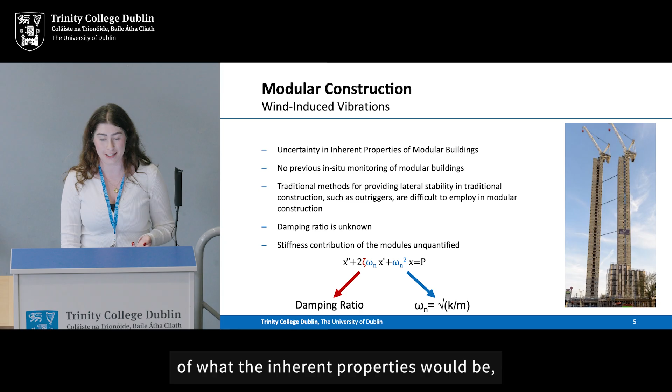So as this form of construction pushes to new heights, it also encounters new problems. And as for all tall buildings, as they become taller and more slender and flexible, the wind-induced vibration response can become the governing design criteria. So one of the main problems with modular construction is that, before this research, there was no prior in situ monitoring of this type of building. So we'd no informed idea, I suppose, of what the inherent properties would be. So in particular, what its damping ratio would be, so how quickly it can dissipate vibrations, and what its natural frequency would be, relating to how stiff it is.

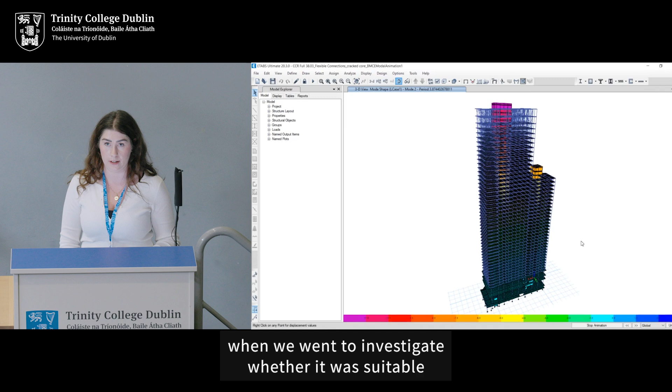So this obviously brought about issues when we went to investigate whether it was suitable and met SLS design or habitability requirements. So habitability requirements are normally set out based on lateral accelerations, and if they're exceeded, it can cause issues like occupant discomfort or nausea and difficulty concentrating. So obviously if you're paying millions of euro to build a building, you don't want issues with your occupants feeling sick. So we need to make sure that modular buildings, as they reach these new heights, can meet these criteria. So that's how we began our industry partnership.

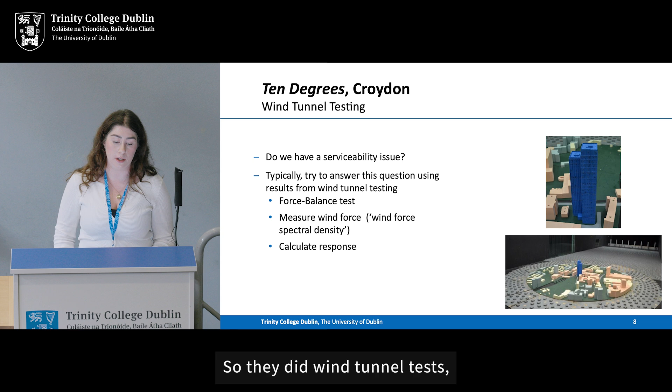And our partnership began with Barrett Mahony when they were designing this, and initial models kind of gave indication that maybe SLS requirements would be exceeded, and they needed to make sure that they weren't going to be. So they did wind tunnel tests, which is the typical initial starting point, but we didn't know the inherent properties, we didn't know the damping ratio, and we didn't know how stiff it was, so the wind tunnel tests couldn't be that accurate without knowing those properties. And with the uncertainty about these modal properties, we just didn't know, basically, if serviceability issues would be a big problem. And that's where we began in situ monitoring.

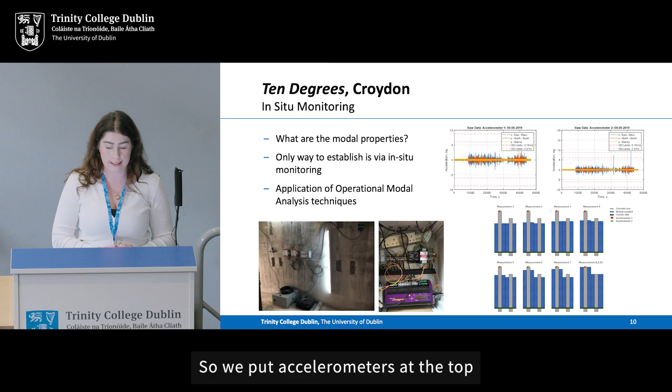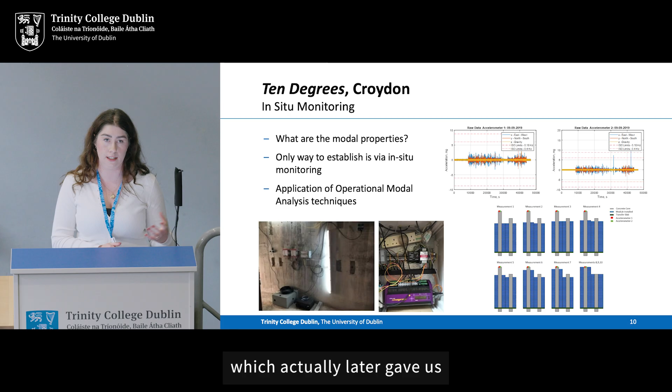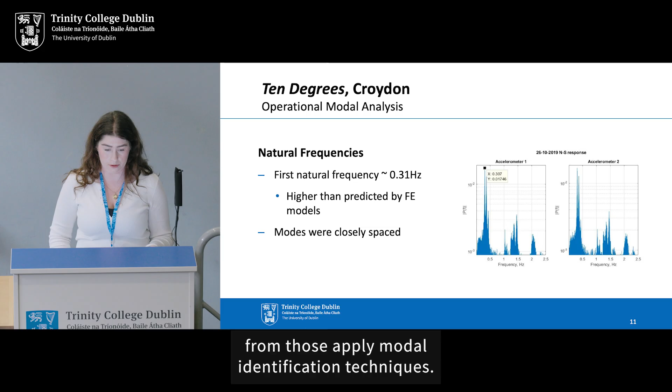So we put accelerometers at the top of the taller core, and we had them there for about 6 months. So 10 measurements were taken during construction as well, which actually later gave us really interesting insights into how stiff the buildings were. We recorded accelerations for 12-hour periods during significant wind events. And we were able to then, from those, apply modal identification techniques, so something like a Fourier transform to get the natural frequencies, and then more advanced techniques to identify the damping ratio.

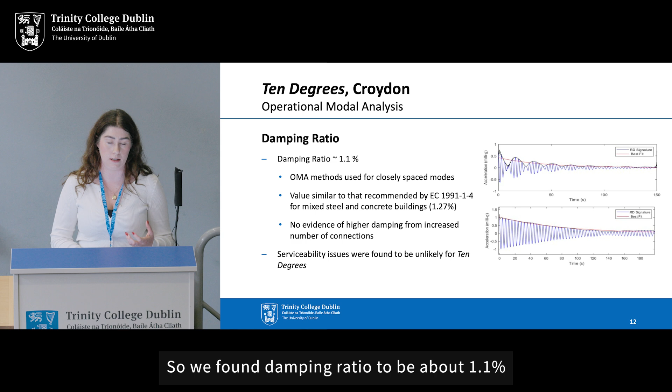So interestingly, we found that the damping ratios were actually really close to values recommended by Eurocodes for mixed steel and concrete buildings. So we found the damping ratio to be about 1.1%, and the recommended value is 1.27%. So our initial guess maybe wasn't so far off. So that's had a wider impact then and enabled improved design of modular buildings.

And actually our research for this won the IStructE 2024 Research into Practice Award as well, which was a great achievement. So from this one set of data, we were able to do a lot of research, a whole PhD's work, and continuing research, I suppose. And that helped us identify the damping ratio, the bending stiffness, and the mass of this form of building. And from that, we were able to build multi-degree of freedom surrogate models, which then can be used by Barrett Mahony or our industry partners to better design these buildings and have more confidence as well.

So yeah, basically high-rise modular construction presents a lot of opportunities and challenges, and through our research and getting in situ data, we enabled improved assessment of serviceability issues, and this facilitated further research questions and development of useful tools for the design of modular buildings, and it's had a direct impact which enables more confident design of modular high-rise buildings.